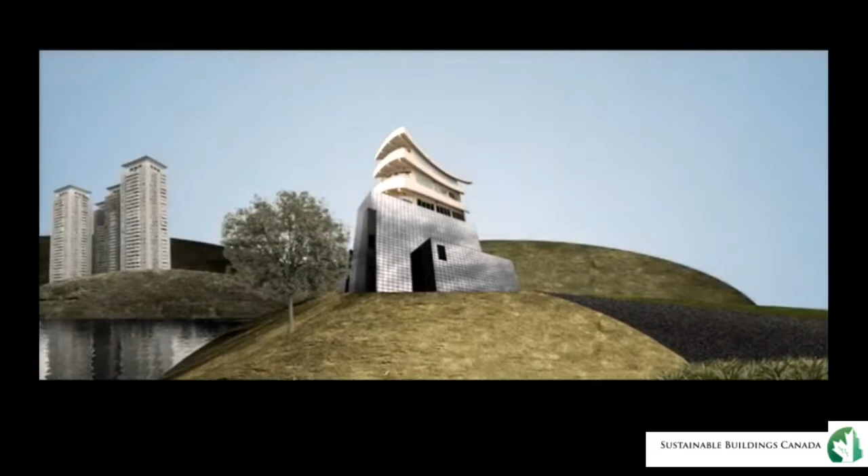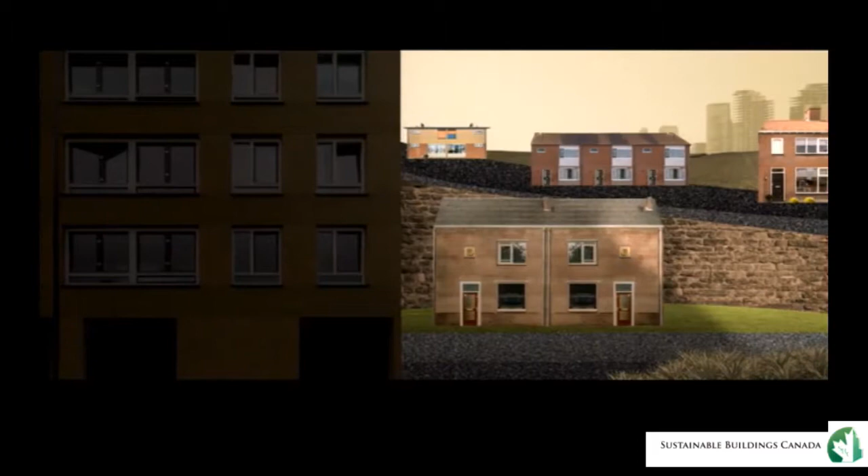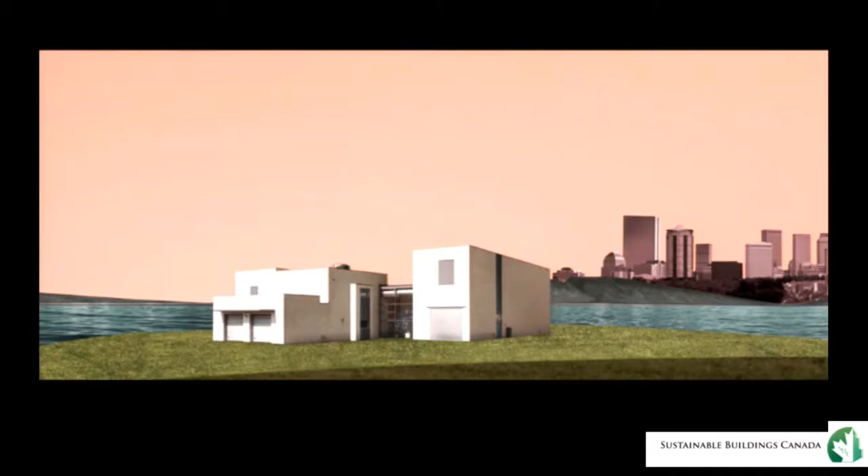We waste a lot of energy, much of which is used in our homes. At the same time, we pay high energy bills in order to live in houses that are actually often uncomfortable because of humidity, mold and drafts. What can we do about this? The Dutch initiative Energiesprong has come up with an idea. The team at Energiesprong have developed a method to transform existing houses into net zero energy houses. Net zero energy means that the house generates as much energy as it needs for heating, hot water, lights, and household appliances. This is made possible by the use of new technologies such as prefabricated facades, new smart heating and cooling installations, and insulated rooftops equipped with solar panels. This all sounds great, but who's going to pay for it? In actual fact, the money that you'd normally spend on your energy bills pays for the renovation. So you get a makeover for your house without any additional costs. Hundreds of people in the Netherlands already enjoy more comfortable living conditions following their successful net zero energy makeovers, and new makeovers are taking place every day. Together with government and banks, Energiesprong creates the right market conditions for innovative companies that want to invest in and develop these net zero energy makeovers. These are all based on prefabrication and industrialization, allowing performance to be driven up and costs down. To learn more, go to energiesprong.eu.

So the Energiesprong program offers a market transformation strategy to stimulate investment and innovation in whole home retrofits and zero energy housing. It's not a technology program, it's a market transformation program. Essentially, the original founders of the program 5 or 6 years ago aggregated 100,000 units of social housing through various social housing providers to create a market demand for this particular type of refurbishment. Based on that market demand, they went out to the market and asked that the market provide the solutions.

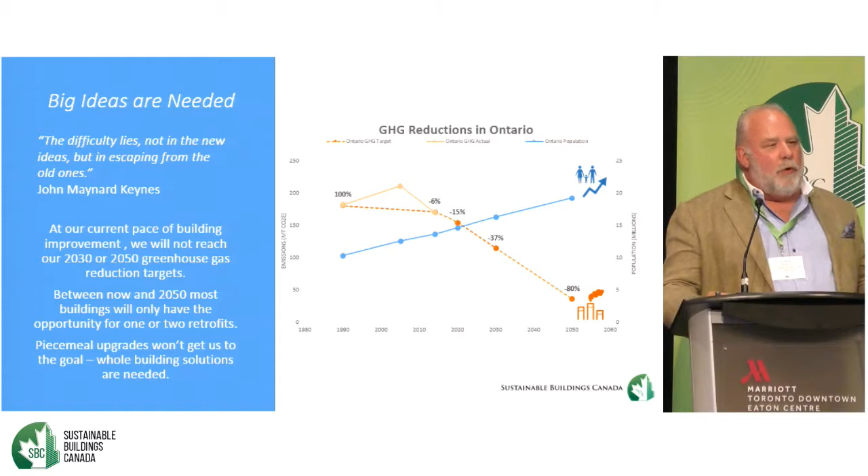We've all seen this particular graph. We have the blue line for population growth, and we have our energy targets. What they were able to determine is that the piecemeal approach to energy retrofitting, incentives for furnaces or for window replacements, is not going to get us there. We really do have to take a whole home approach. So the approach that they took was to do this through what we would call here a P3 contract. They do not specify the technologies that are required. They specify these 4 conditions.

And this is what we, as Sustainable Buildings Canada, would see as a market transformed at the end of this program that we're going to be presenting to you today.

So the first requirement within their contract is the home is net zero, and by that we mean designed to eliminate monthly energy bills. So net zero energy fuel cost is the metric. It needs to be non-intrusive.

One of the biggest challenges in refurbishment of social housing is the relocation of those people while the work is done. So the work is required to be done within 7 to 10 days.

It needs to be affordable, so this is all paid for through savings. And it needs to be comfortable and guaranteed for a period of 30 years.

So gone is a specification for an R28 wall and a triple glazed window, and this is the specification that is presented.

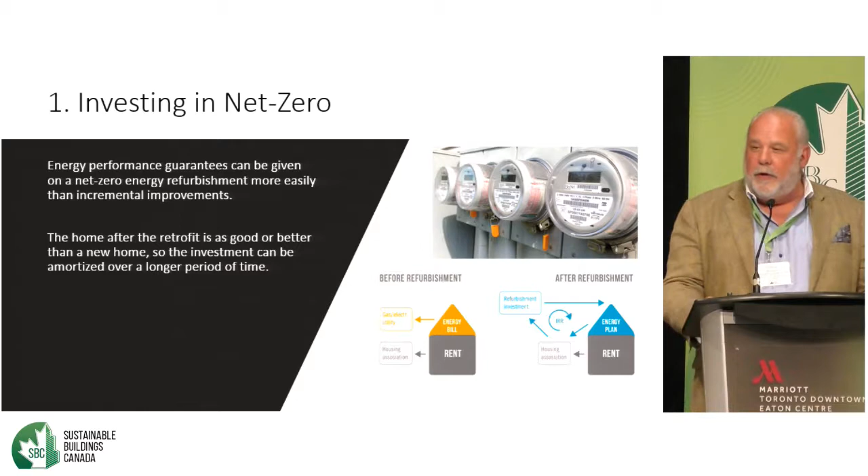The home after the retrofit is as good or better than a new home, so the investment can be amortized over a longer period of time. In the Netherlands case, it's 30 years.

So number 2 was the right type of housing here in Ontario. The European model of retrofitting low-rise townhouses is actually very well suited to the Canadian context. Ontario has many similar design buildings.

In our social housing sector, many of which are expensive to operate, and we all have heard the press about how in need of repair they are. The size and nature of these structures make them ideal from both a technology and construction approach for the technologies that were developed by industry and then applied to the refurbishments.

However, here in Canada, we have climate conditions that are different than in Europe that are required to be considered, and we have basements, which is something that presents a particular challenge to the financial model here in Canada.

What we do have, though, is a very large stock of social housing buildings in need of repair and 2 levels of government currently committed to funding that repair. So reaching the initial economies of scale is critical to the success.

If I were to go out and try and run this program in the private sector, I would need to talk to 1 million individual homeowners to get 10,000 of them to agree to this program. Once the approach has been successfully demonstrated, though, through social housing, it can then be rolled out to the private sector, and I'll show you examples of that having been achieved.

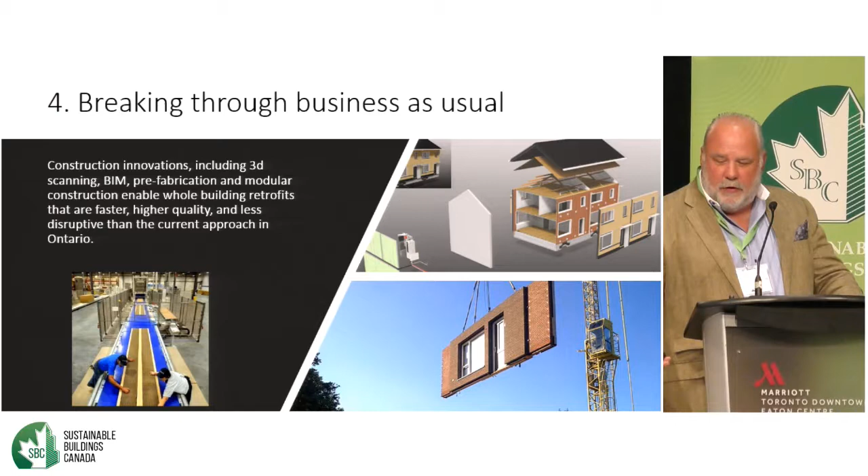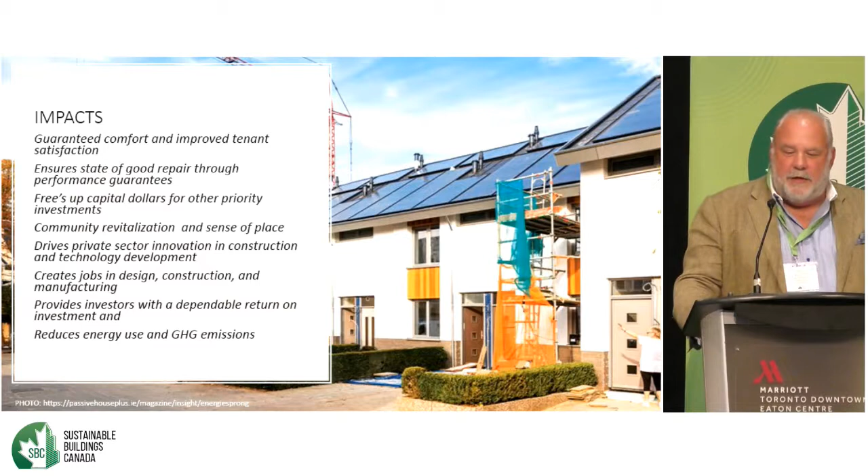We would be able to ensure a state of good repair through these performance guarantees that would be required as part of the performance contracting. It would free up capital dollars for other priority investments like interior retrofitting, kitchens and bathrooms. Community revitalization and a sense of place was one of the significant side benefits that came out of the program in the Netherlands. It drove private sector innovation in construction and technology development that has now moved into the private sector, creating jobs in design, construction, and manufacturing, and providing investors with a dependable return on investment. And finally, key here, in Ontario, it reduces the energy use and greenhouse gas emissions.

So once we've completed that particular phase, we have now moved into where we are today, which is in a funding phase. Within the last month, we have provided proposals to the MOECC to fund the market development team, which is to hire the individuals required to do this work. We provided a proposal to the Ministry of Housing that would see the refurbishment of 5,000 units. We are establishing a design competition and pilot funding expression of interest that was submitted to NRCan's Green Infrastructure Phase 2. We await the responses of that. And we've just started and will over the next couple of weeks be looking at the first prototype funding proposal in process through a new program through the Municipal Infrastructure Fund working with the Region of Durham.

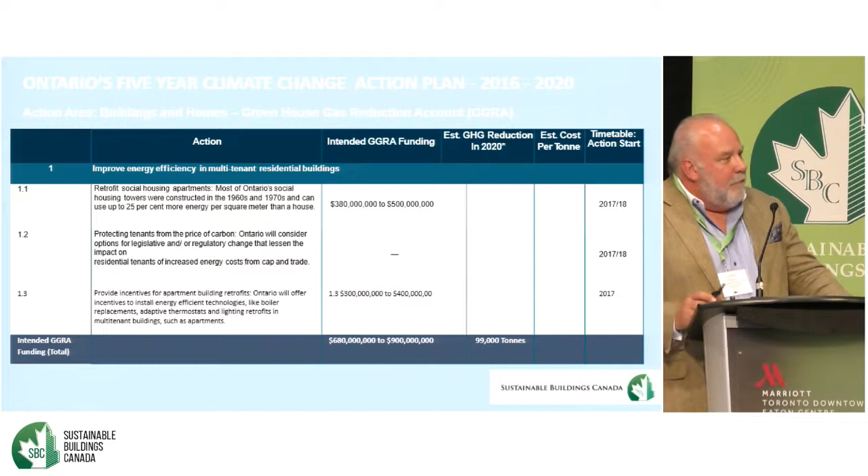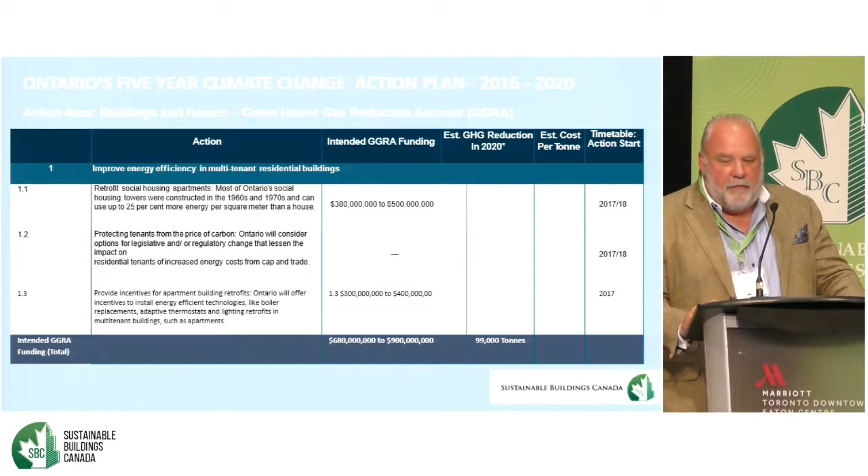Where does the money come from? Well, we have several commitments right now, and these commitments could be redirected into a program of this nature. So I would point first to the Climate Change Action Plan that has committed funding in the order of $380 million to $500 million for social housing retrofitting, and an additional $300 million to $400 million for the refurbishment of private sector apartments.

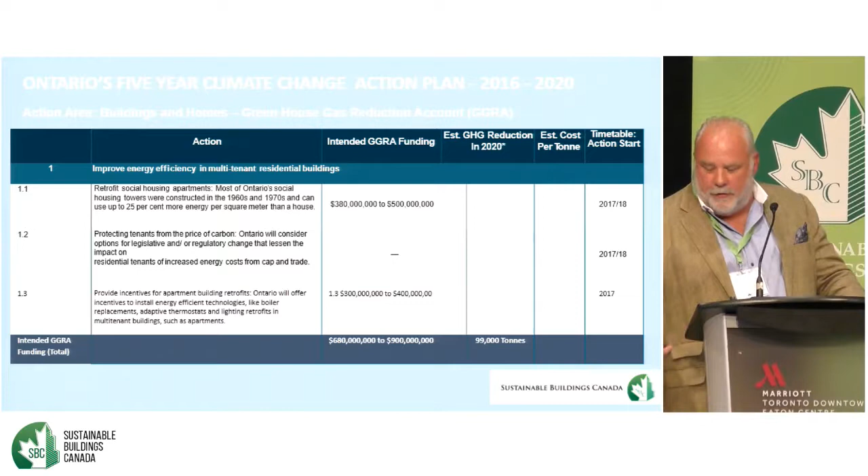We also have a federal government looking at this, talking about an inclusive national housing strategy. To quote from their budget: as part of a new national housing strategy, the government will invest more than $11.2 billion in a range of initiatives designed to build, renew, and repair Canada's stock of affordable housing, and help ensure that Canadians have adequate and affordable housing that meets their needs. This includes $225 million to improve housing conditions for Indigenous peoples not living on a reserve. $2 billion of this money is being committed to refurbishment.

So the example in the Netherlands was a 50% reduction in construction cost over 5 years from the initial pilot project. The first project, Roosendaal, was done in 2010. It took 2 weeks to do, and it cost €130,000 per unit. In Kerkrade, the next year, they were able to get that down to 10 days and reduced it to €100,000. Apeldoorn was done in 2012. In 1 week, they were able to refurbish these units - and these refurbishments are full net zero energy refurbishments - and they did that one at €80,000.

When we went over to have a look at the projects, one of the projects we looked at was Arnhem, started in 2014. The cost was €60,000, and they completed the refurbishment in 1 day.

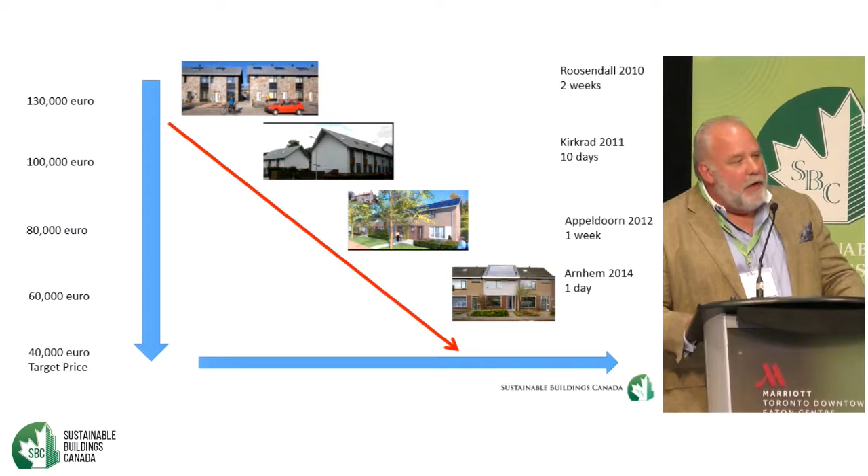So we've put together a proposal to the government that basically looks like this. We would say that we would look at reducing that target refurbishment cost per unit between 2017 to 2030 to a paid-through savings scale. We would propose that the government initially fund the prototype and pilot stages through to the proof of concept stage. A target price is established based on the net present value of the 30 years of avoided fuel costs and the operation and maintenance costs of those existing buildings between now and 2030.

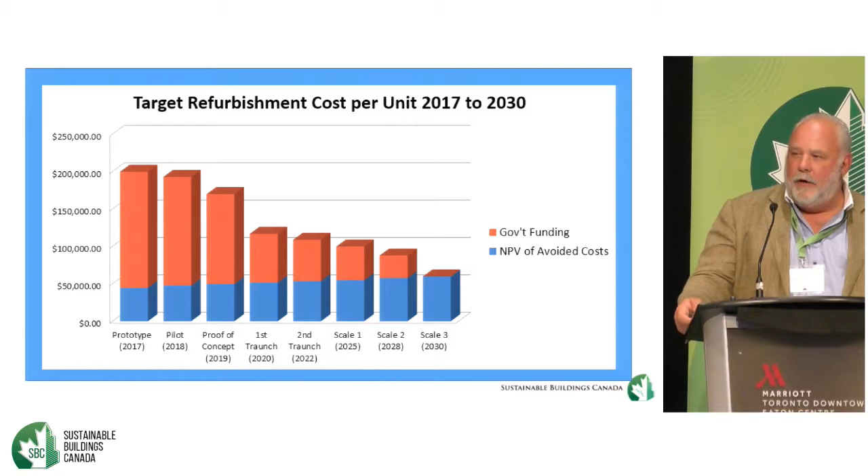Then, by allowing large-scale tenders of 2,000 units at a time, we would expect that we would be able to reduce those costs down to the range of the target price, which would be in the $40,000 to $50,000 Canadian range. That's roughly what we estimate the avoided fuel costs and the avoided O&M costs for today's social housing.

So where does that lead? It leads to new housing, same innovation. In the Netherlands, they were able to reduce the construction costs by 50% through a combination of industrialization of the process and through supply chain efficiency. Very large contractors invested in automated manufacturing facilities for panelized wall assemblies in order to do these refurbishments.

What they discovered shortly after was the same social housing providers came back to them and said, you know what, we have a big piece of land that abuts that, and we need new housing - can you provide us zero energy new housing? They took that challenge on and were able to successfully build new social housing at the same cost as code-built housing there. And finally, these large contractors, who were typically commercial contractors in the past, have now set up development arms and are producing factory-assembled, zero-energy housing for sale to the private sector.

So the million-dollar question: how do you do it in a day? This is the project we went to see. Could I ask you to start the video?

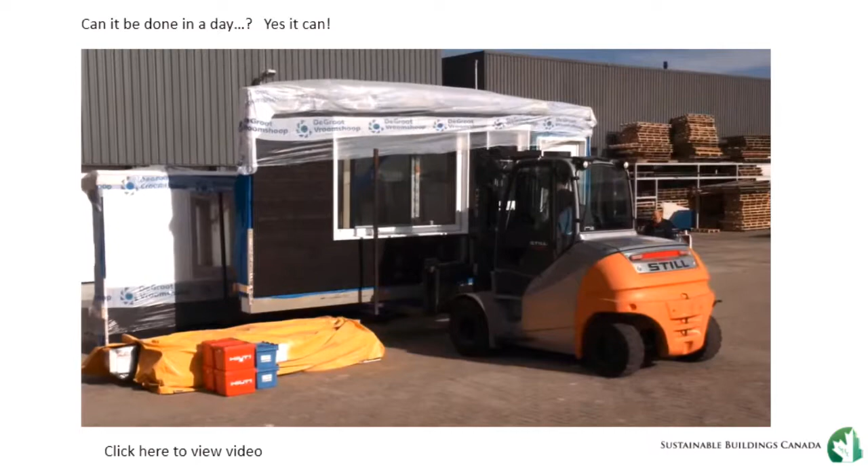So this is loading up at the factory the day before.

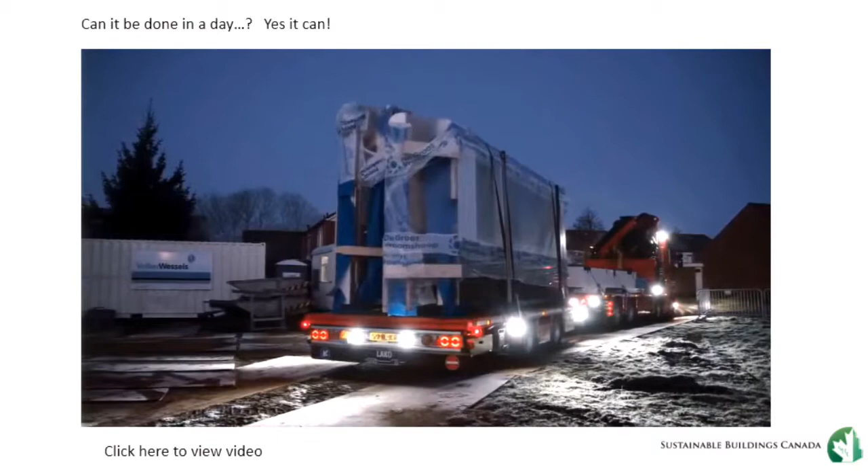This is the next morning.

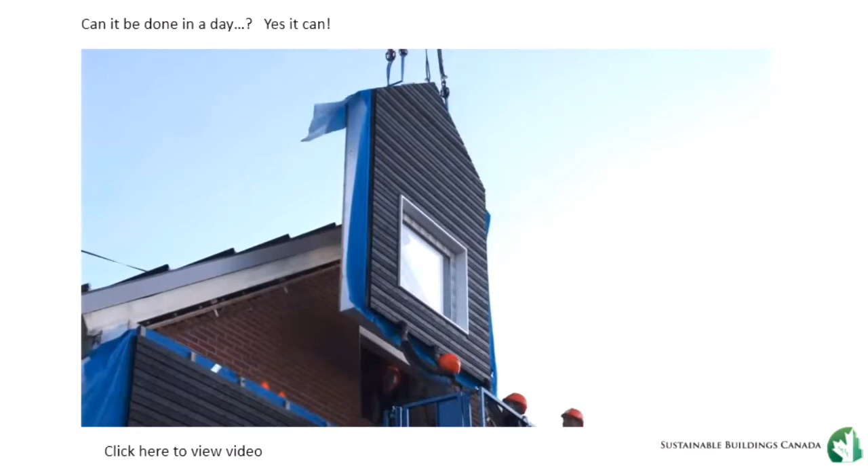And this is what the tenants came home to at the end of the day.

And that's it. So I can tell you from having gone out there and watched them do it, they can do it. What we need right now is a commitment from all levels of government to get behind this type of program in order to move the initiative forward.